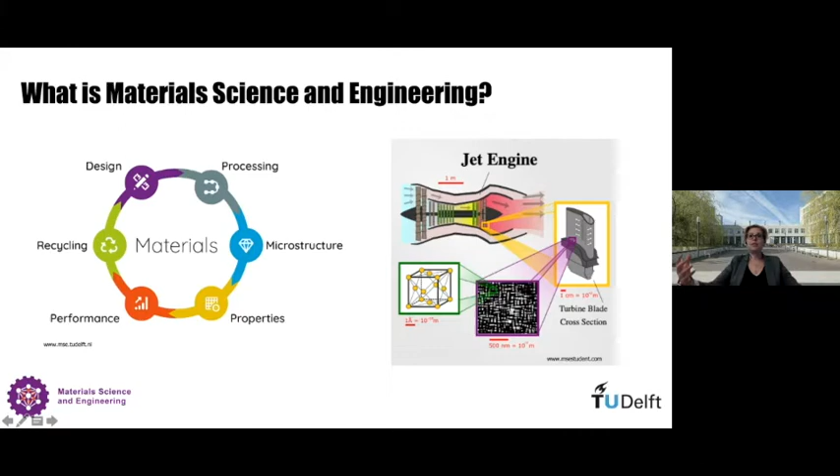As you can imagine, everything is made of materials, and therefore material science is very relevant. Normally we hear that material science can be the bottleneck of modern engineering and developing new technologies. And this is true. If you want to move forward in technologies, we need to innovate in materials. Materials are essential to give solutions to challenges in society and also support industrial top sectors such as energy, new energies, infrastructure, technologies, health and life, automotive, and so on.

If you have a look at the European Union websites or the governments in Europe, at the current global grand challenges in our society, you can see that materials play a crucial role in all these challenges. What are these global challenges? You have sustainable cities, climate change, global health, food, water and energy, digital transformation. In all of these, materials play a role. And I can give you 2 examples.

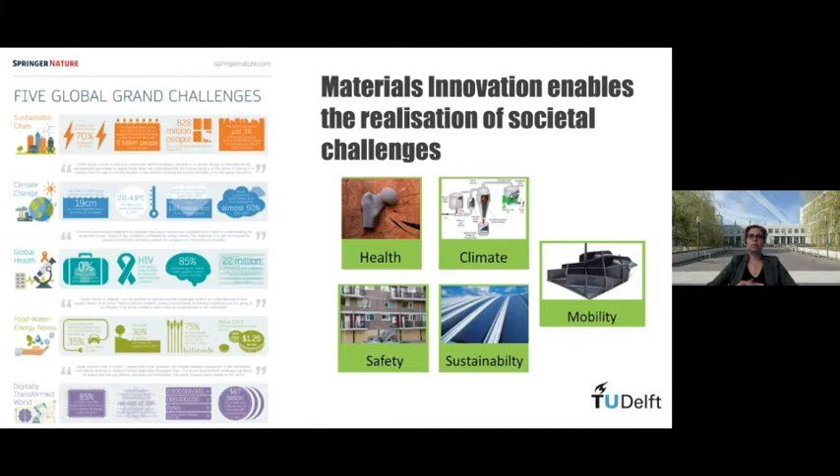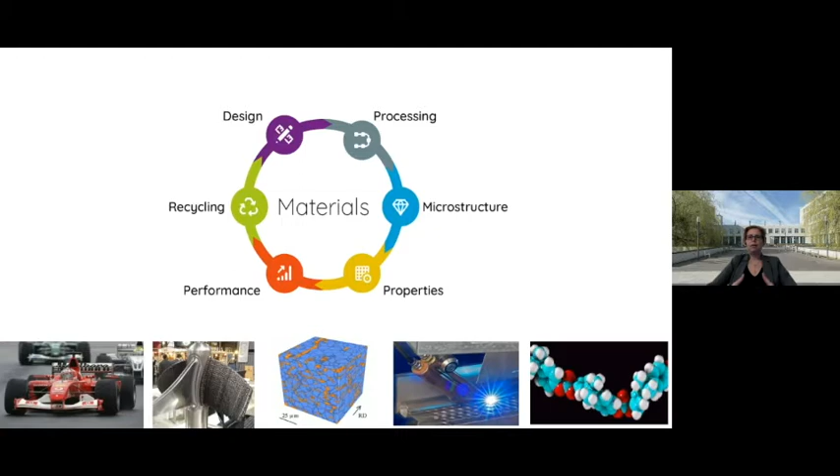As you see, the importance of materials. Within all these aspects, what is relevant in the last decades and becoming very crucial in the future is that we need sustainable solutions, and sustainability should be present in the whole life cycle of material. This is what I show in this picture. By sustainability, we have to find efficiency in process and application, alternatives to scarce or limited raw materials, and facilitate solutions for better reuse and recycling of materials.

With this kind of summary, I want to show you the importance and the relevance of material science and engineering, and our position in our department. I have to say that in the Department of Material Science and Engineering, we cover in research and in expertise the whole life cycle of a material, and we really pay close attention to sustainability.

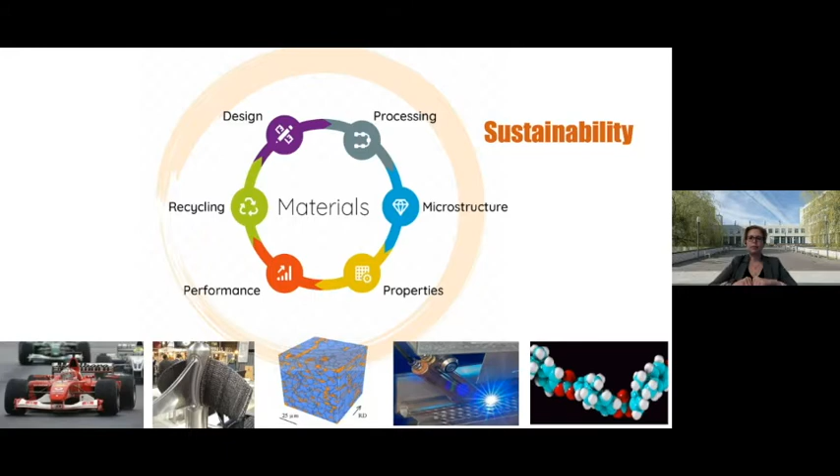And this is reflected also in the program. And that brings me now to the part of what you are interested in, the Master of Material Science and Engineering. And I would like in the next slide just give you some flavor of what is the master. The first thing is a unique master in the Netherlands. There is not any other program that offers material science and engineering as a core content of a master.

And during the studies, you will get in-depth understanding of the main classes of materials. And especially we focus on metals, polymers, and ceramics from nano to larger scales. I again show this diagram here because we try to keep present in the content in the different courses, in the different aspects of materials, the importance of sustainability.

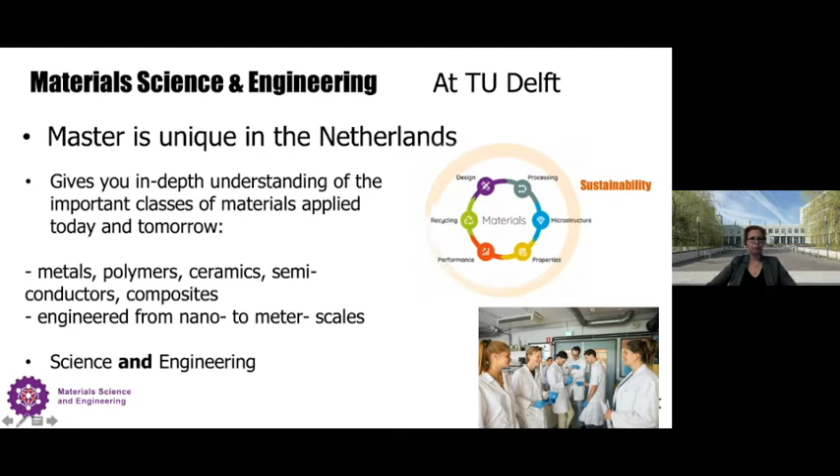While studying in the master, you will be introduced to scientific challenging topics. And indeed, we have a strong background in science, in material science, but we never forget the contact to the industrial application. That's the reason that you will be introduced to scientific challenges, but with a clear connection to applications and solutions that can be applied in industry. That's the reason that during the master, you will have numerous opportunities to interact with industries and also with experts in different fields in material science and engineering.

One of the main characteristics of this program is that we normally have a relatively small group of students. Every year, lately we have around 60 students. That is an excellent opportunity to get to know each other during the 2 years program, but also to have a closer or better interaction with the staff and docents.

Another peculiarity of this program is that it's quite international. From the staff and docent team, in which we have quite a diverse number of nationalities, but also in the student group. And we have every year students from many different places. That gives us actually an interesting and very friendly dynamic during the lectures, but also during the time outside the lectures to interact with your colleagues, researchers, and also staff.

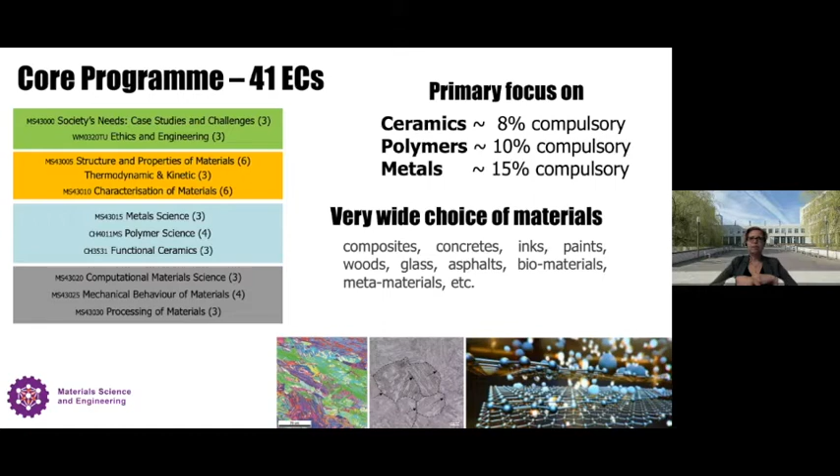As I said, the second part is the specialization program. To complete the specialization, you need to have at least 34 credits, and basically the main goal here is that you go a step forward in your formation, and you get in-depth knowledge about a specific class of material or a specific thing within materials engineering.

We have 4 predefined specializations, highlighted here: materials in engineering applications, metals science and technology, materials for sustainable development, and advanced construction materials, which is given together with the civil engineering team. Of course, it may happen that these themes are not within your interest or don't fulfill your curiosity or your professional interest. That's the reason that we also offer the opportunity for students to define their own specialization.

Within these options, and I will go one by one just to give you a short description, just to mention how the specialization looks: within these 34 credits, you have a core or obligatory part, which should be equal to or more than 14 credits, depending on the specialization, in which you will have a selection of courses focused in a specific area, and then to complete the program in 34 credits, you have room to choose among recommended electives and other electives.

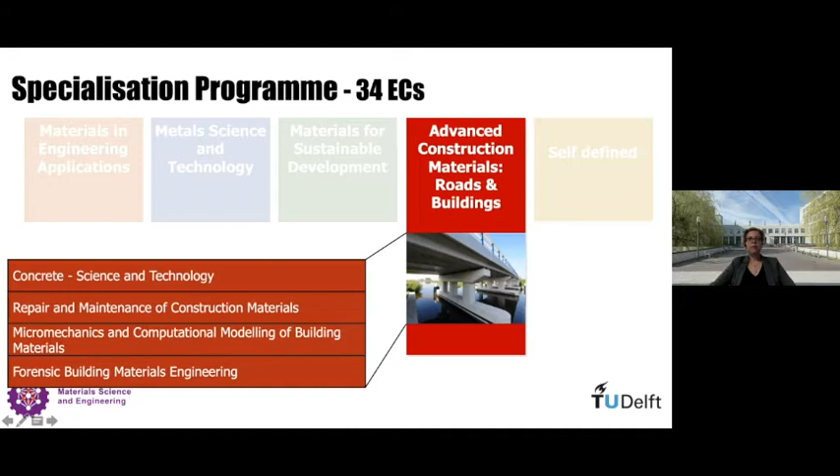Of course, as I said, you may not be fully satisfied with this topic. That's the reason you can create your own specialization. The only requirement is that you have at least 14 credits following a common theme or a common topic, and it can be a specific material class or another application. The advantage is that you can really select courses from other faculties and other fields, and you really can create your own curriculum. You need to pay attention to some difficulties about clashing between courses, but that's something to discuss. But in general, you are free to choose your self-defined specialization, and it should be approved by the Board of Examiners.

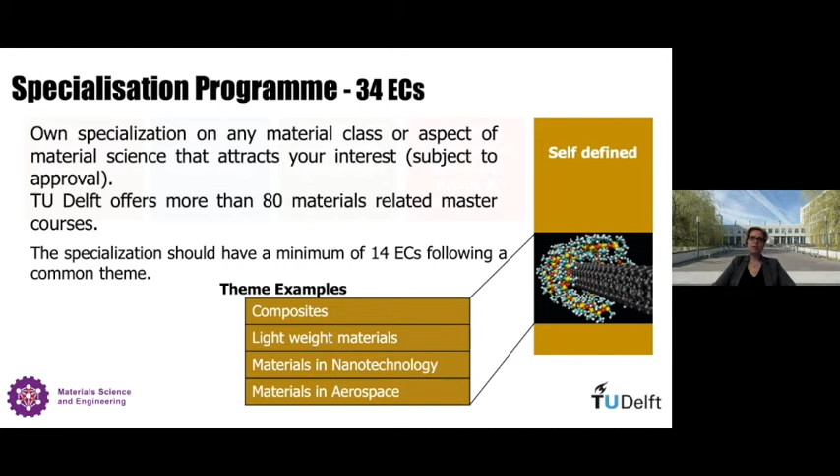Just to give you an example of a specialization defined by students in previous years, if you have interest in composites, you can focus on the manufacturing, characterization, and application of composites, lightweight materials, or materials for specific applications such as aerospace or nanotechnology. Again, in a nutshell, we have different specializations. You have to define your core, but you still have more room to choose between electives and different topics.

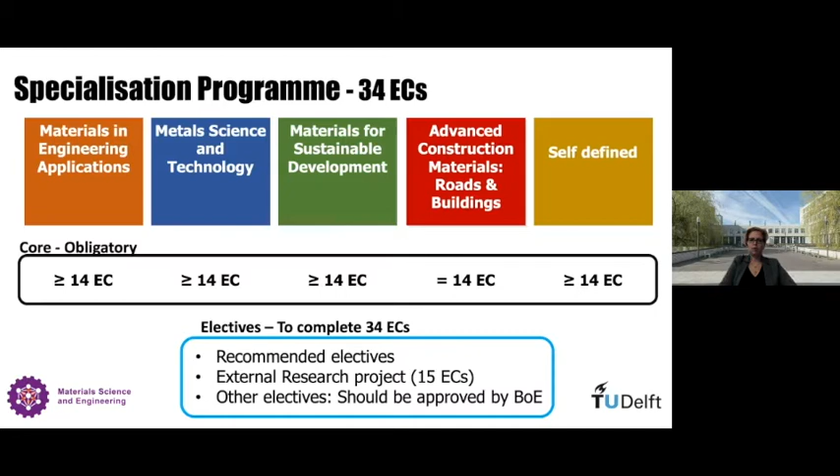I bring this slide back because, as I mentioned, you have many courses, but you also have the opportunity to do the external research project. The external research project is 15 credits, and basically is a project that takes place in an industry or a research organization outside of TU Delft. It should be a research project with a certain research question or research case, which can be finalized within the time that is agreed.

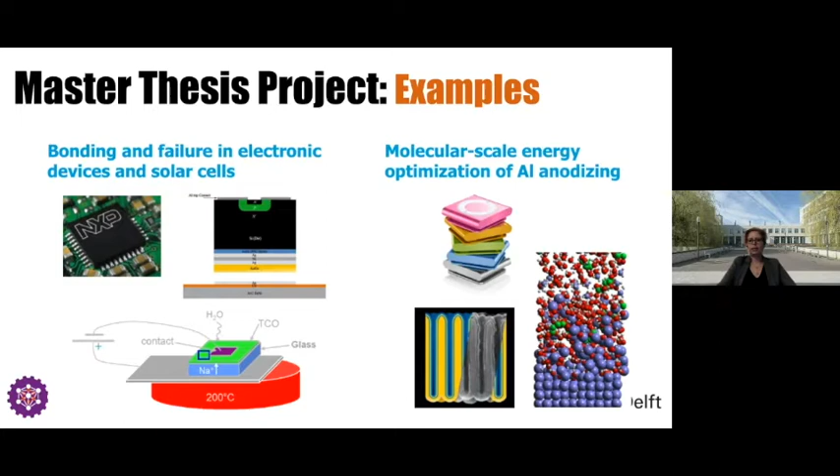Another example is the application of computational materials to optimize a process. Here is an example of optimization of aluminum anodizing. Aluminum anodizing is a typical finishing of aluminum substrates that gives better mechanical properties and durability, and it can also facilitate the application of coatings. Basically, here was modeling of a way to optimize the growth of that oxide layer.

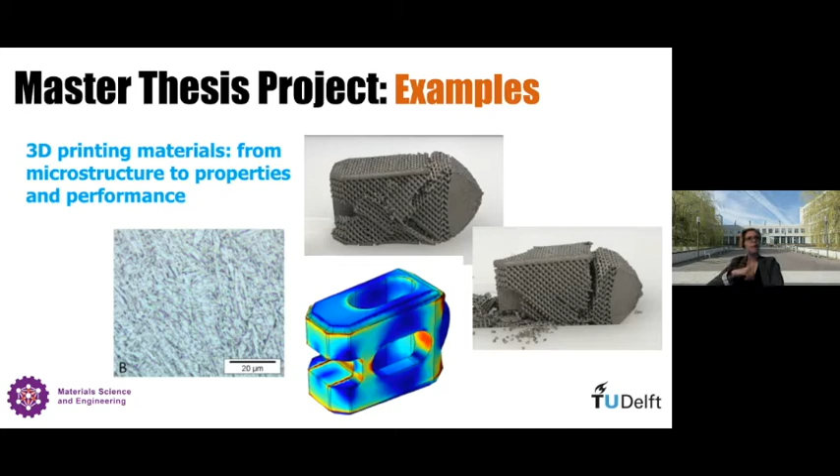Another example, more recently, is the application of 3D printing technology. 3D printing of materials, specifically metals, allows us to create very complex geometries more efficiently, but also gives us room to tune the microstructure in order to achieve certain properties or desired performance. We have several master projects on this topic for biomaterials applications, for example, in which you need certain mechanical properties, but also for larger structures such as engines and propellers in a boat, in which the processing parameters of the 3D printing are important to achieve the required properties.

In general, for the master thesis there is room for many possibilities, and the main message is that you decide the topic where you want to work, and we try to help you and find the right support for that. There are also international opportunities. I mentioned that you can study abroad or do your project also abroad.